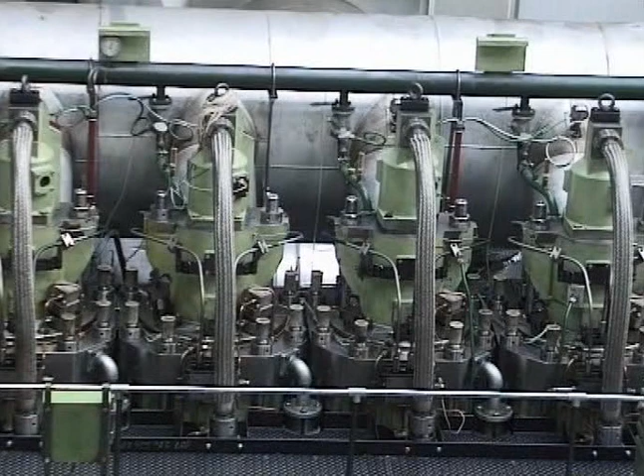This video, together with the operation and maintenance manual, will help you carry out maintenance work on the exhaust valve. Descriptions of functions are found in the operating manual, and instructions for maintenance are found in the maintenance manual. Please read carefully all the pages in both manuals that are referred to in the course of the video.

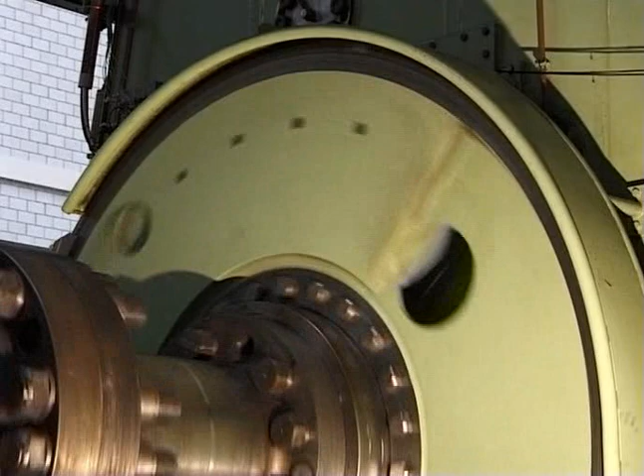After shutting down the engine according to the instructions given in the operation manual and all pumps have been stopped, further preparations have to be made before starting work on the exhaust valve cage as follows. Close the starting air shutoff valve. Open the indicator cocks.

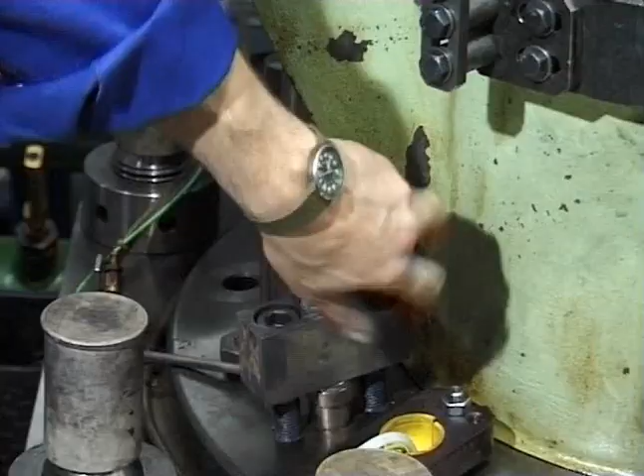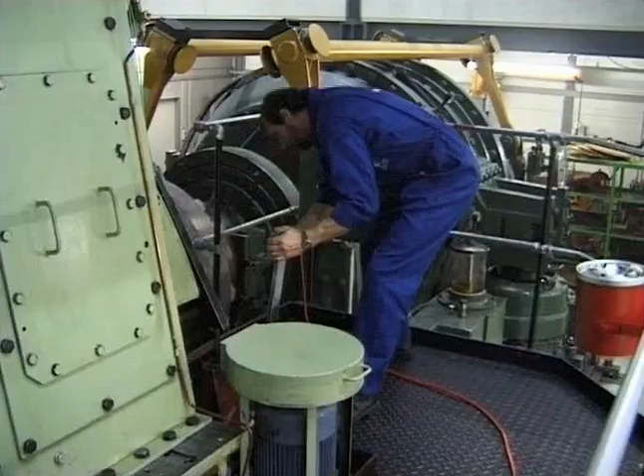Engage the turning gear. Close the exhaust valve air spring supply here. The cylinder cooling water of the corresponding cylinder must be drained according to the instructions given in the maintenance manual.

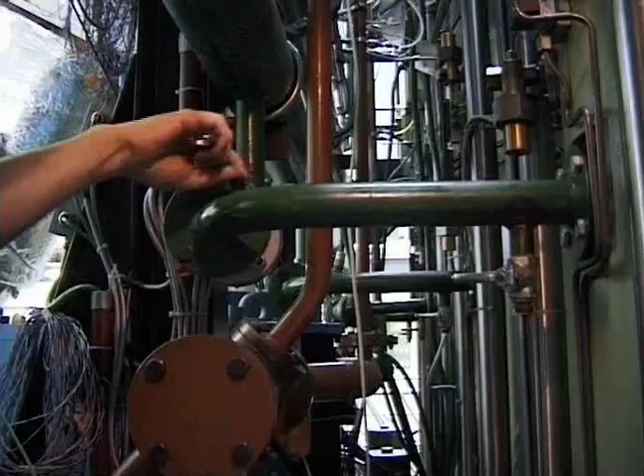First, close the cylinder cooling water outlet valve here. Next, close the cylinder cooling water inlet valve. Finally, open the cylinder cooling water drain valve of the corresponding cylinder.

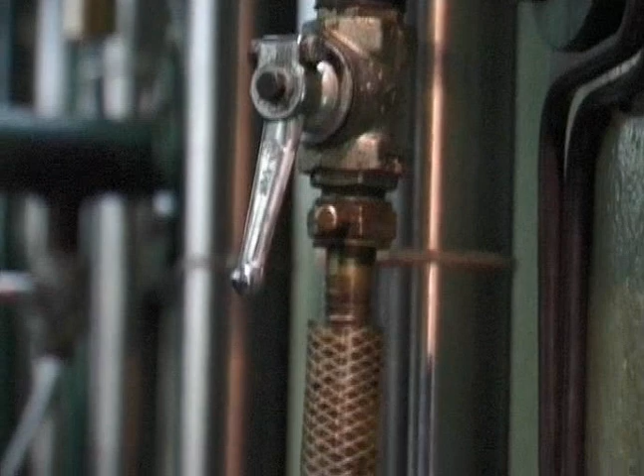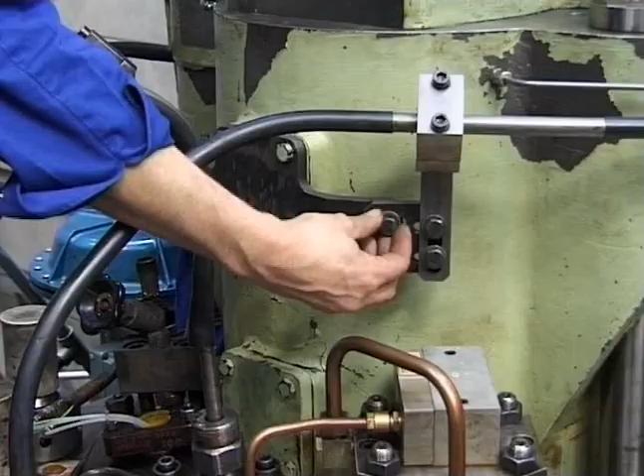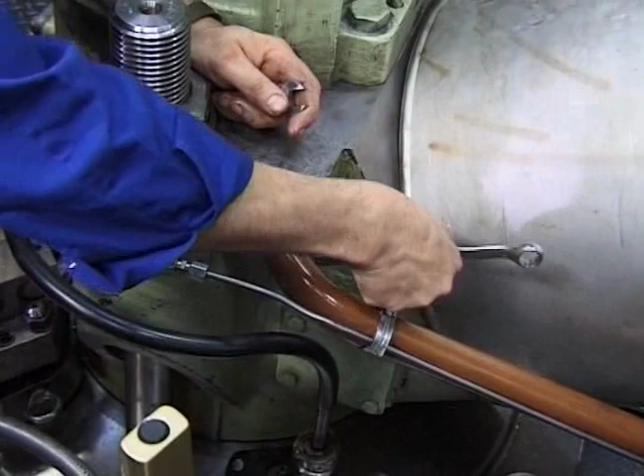Disconnect all pipes which are attached to the valve cage. Protect the pipe connections from dirt and damage. Carefully remove this insulation piece, and if it is still hot, protect your hands by using gloves.

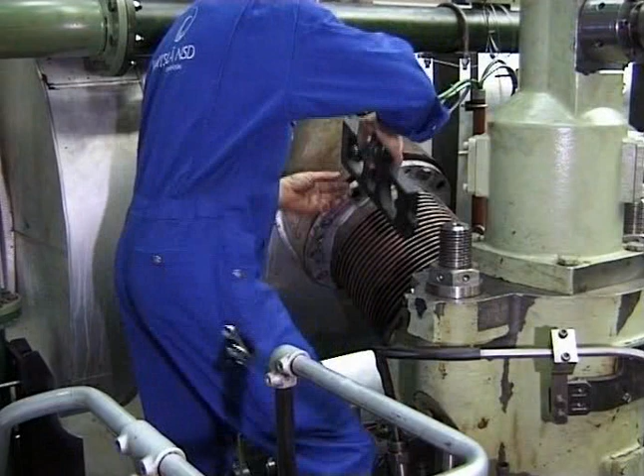The expansion piece will be removed with the help of this lifting device, also provided with the engine tools.

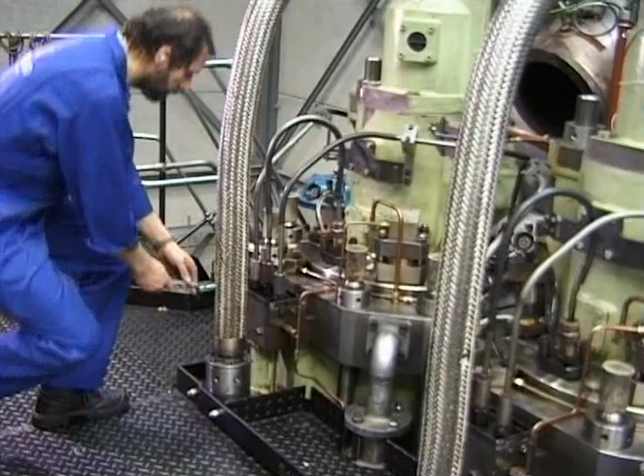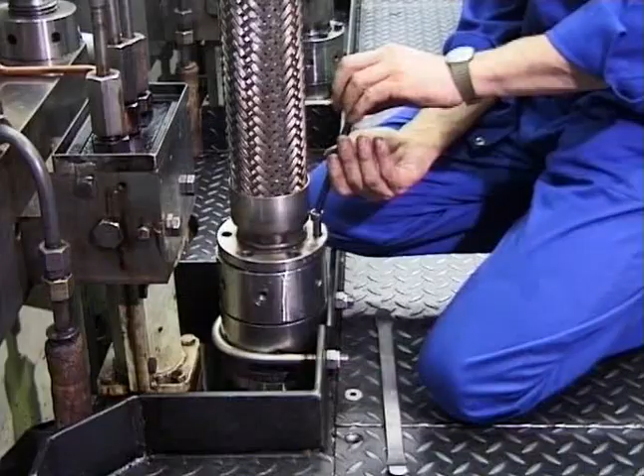Slacken first the lower flange. Thereafter the contained oil will be drained from the high pressure pipe through the double pipe ring area by lifting it slightly from its lower sealing seat. Consult the maintenance manual on this procedure.

After slackening the upper flange, it must be turned back about 7 turns before the pipe can be removed completely.

Also, this ball seat must be treated with utmost care to avoid damaging its surface. Should this ball seat be damaged or in bad condition, it may be repaired with the help of this special milling and lapping device provided with the engine tools. Look up the maintenance manual on this point.

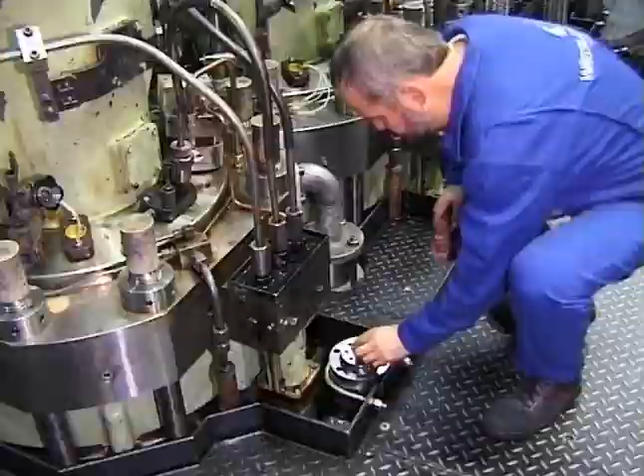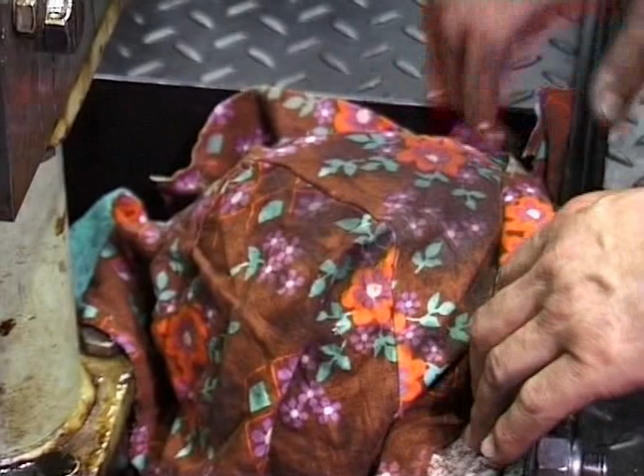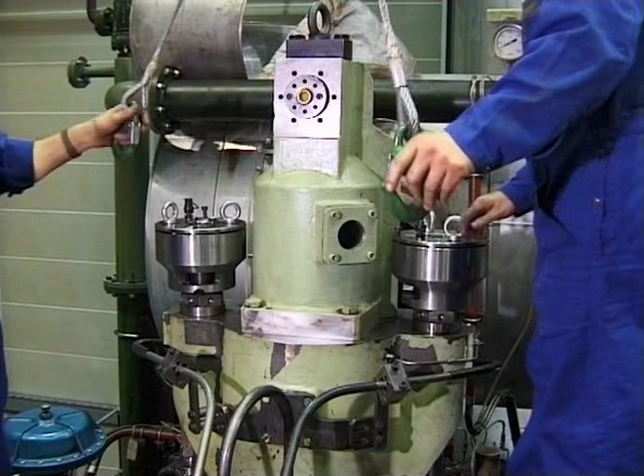Make sure that the stud threads and contact surfaces for the jacks are clean and undamaged. These are the hydraulic pre-tensioning jacks we are going to use to slacken the exhaust valve cage from the cylinder head. Look in the maintenance manual under the section Hydraulic Pre-tensioning Jacks.

Now check carefully all high pressure connections. Make sure that the quick couplings of the high pressure hoses are properly locked. The hydraulic pre-tensioning jacks are now tightened until the clearance at X is very little or zero. The release valve of the high pressure pump must be kept open in order to do this.

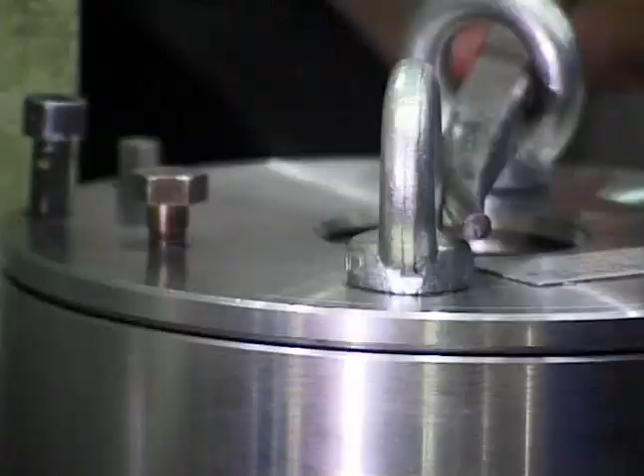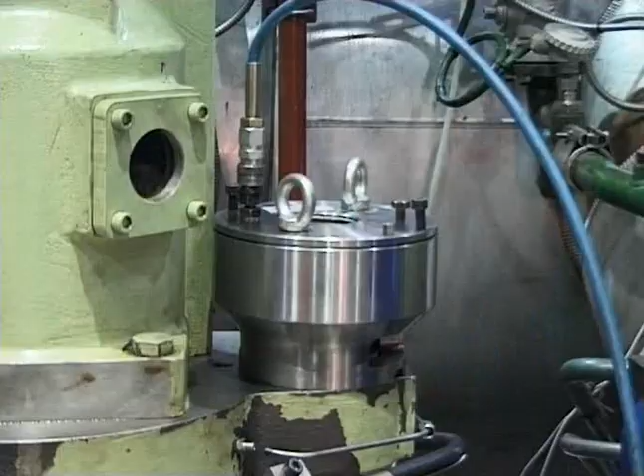Do not forget that when slackening, the hydraulic jacks must be turned back by about 3/4 of a turn. Otherwise the jacks cannot be removed. Look up the maintenance manual on this point. Start the high pressure pump and keep the vent screws open until the oil emerges without air bubbles.

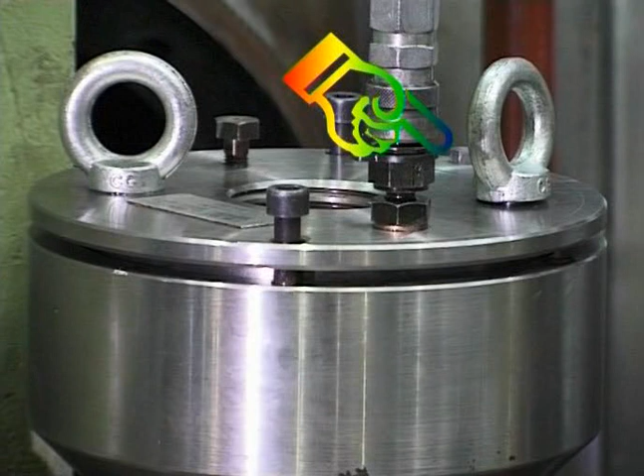When loosening, check that the control pins of the pre-tensioning jacks always protrude slightly above the upper edge of the piston. Consult the maintenance manual on this point. Please remember to follow all the safety precautions when using hydraulic equipment, especially the use of safety goggles. Remember, protect your eyes.

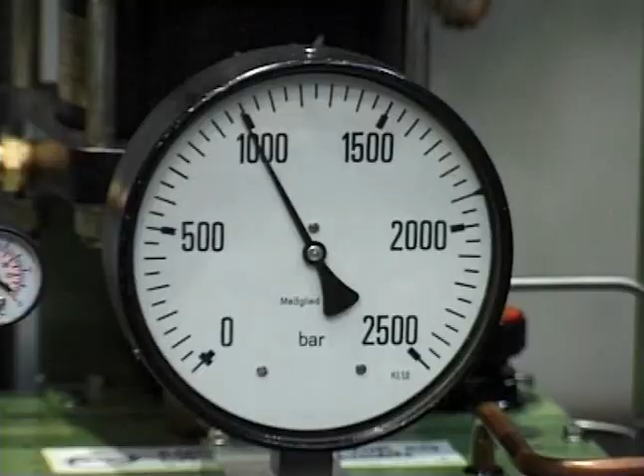Raise pressure to about 1000 bar so that the nuts can be slackened with the help of this Tommy bar. Finally, turn the nuts back about 1 to 2 turns. Before lowering the pressure completely, check if the nuts can be moved freely.

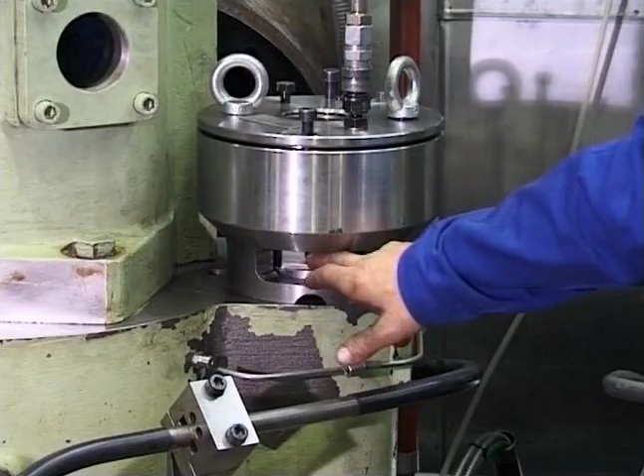The nuts holding the valve cage are now slack. Remove the jacks and also take off the nuts completely. The valve cage is now ready to be lifted off.

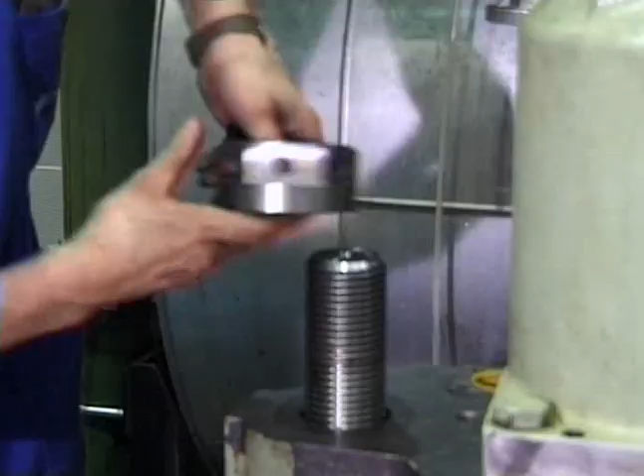Check once more if all pipes have been disconnected before lifting off the valve cage. With this lifting device, which is included in the engine tools, the valve cage can now be lifted off the cylinder head.

Note, it is absolutely forbidden to lift the cylinder cover together with the valve cage only on these two eye bolts. Now carefully lift the valve cage from the cylinder cover.

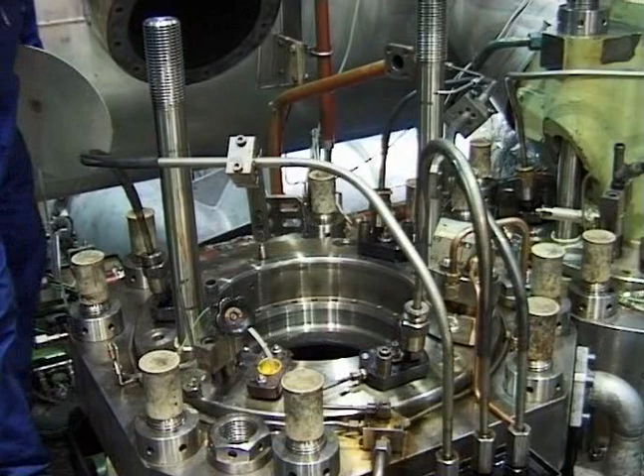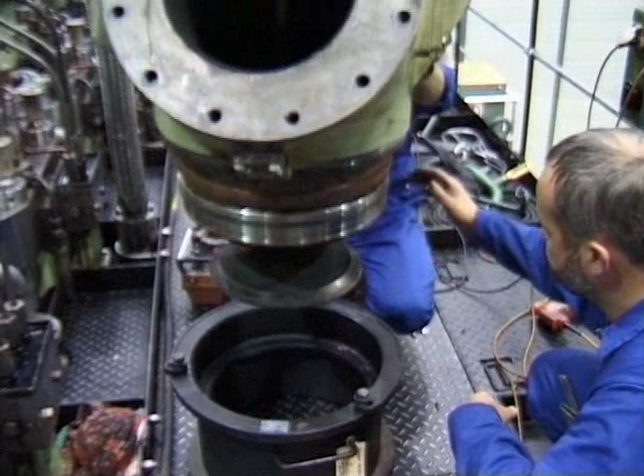After lifting the cylinder cover, the combustion space must always be covered to prevent any dirt ingress. The valve must be protected against damage. For that reason, the valve protector has to be fitted whenever the valve cage is dismounted from the engine.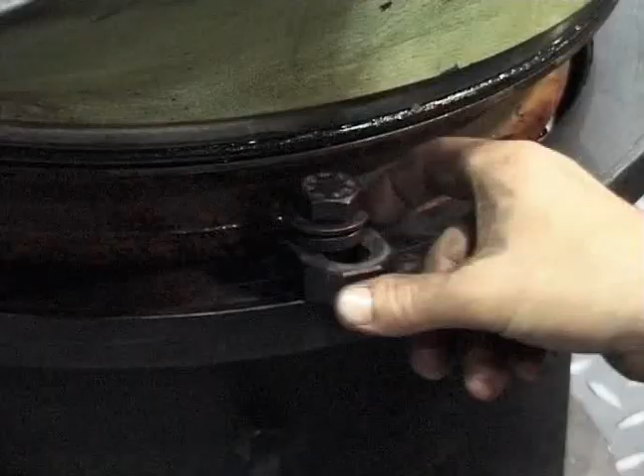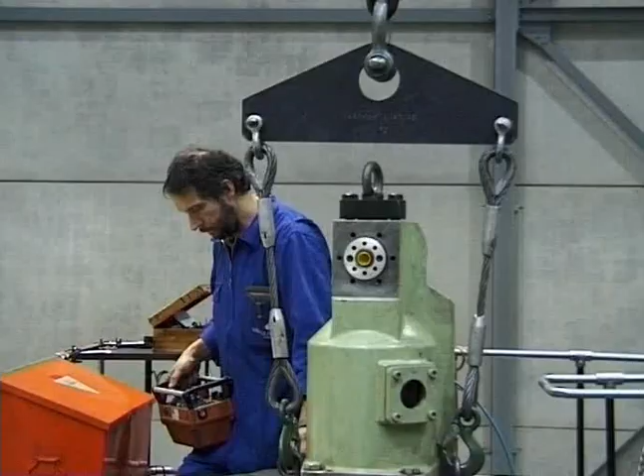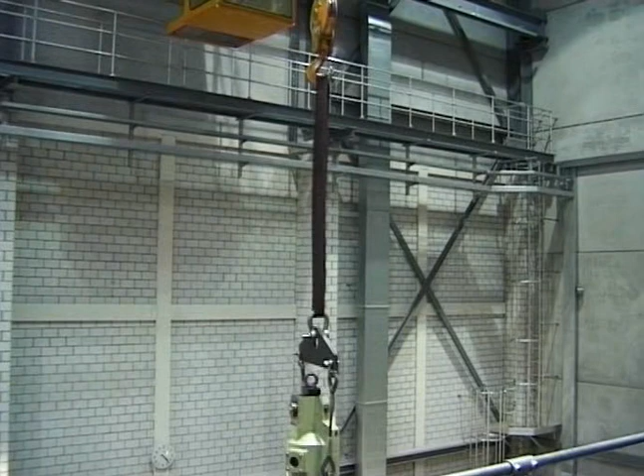The valve cage is transported to a place where overhaul of the valve will be undertaken. That place should be as free from vibration as possible. Please note that damaged or worn down valve sealing surfaces can be reconditioned. Such work on Nimonic valves may only be carried out by specialised Wärtsilä NSD reconditioning centres. A new spare valve cage or a reconditioned one must always be on board.

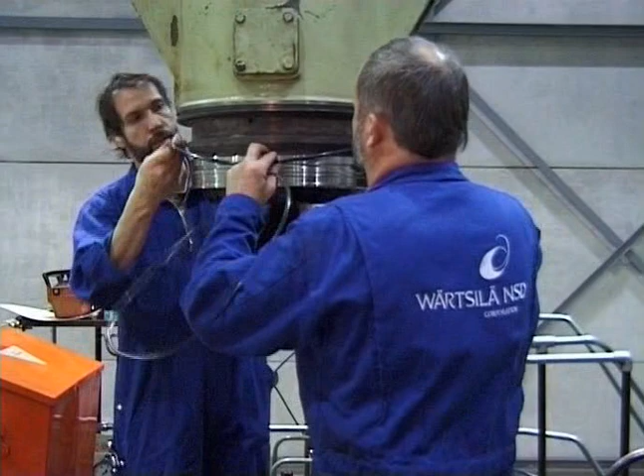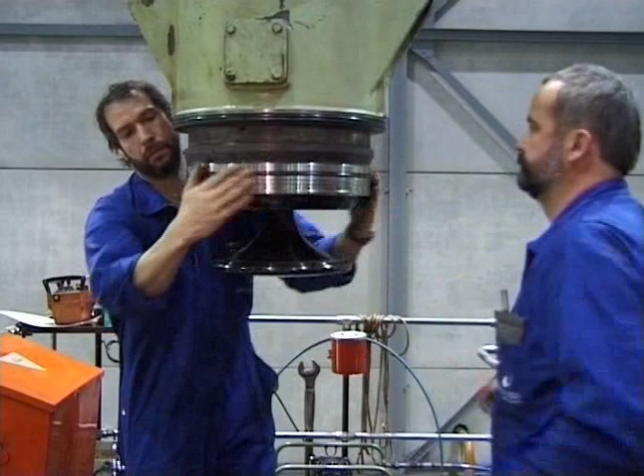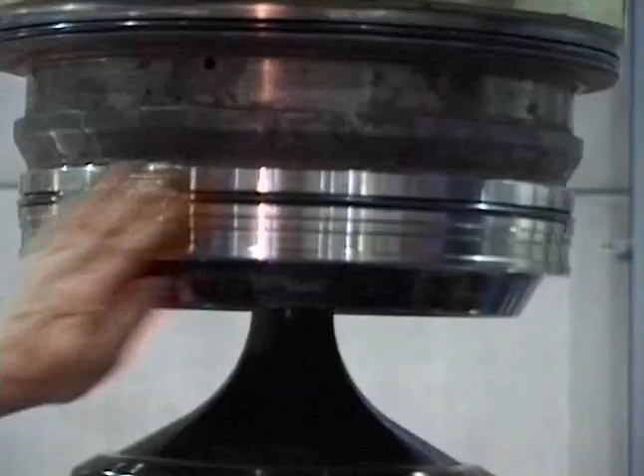As a general rule, replace all O-rings by new ones of specified dimensions and quality. Consult the maintenance manual for details. Oil O-rings slightly with clean lubricating oil. The sealing surfaces between the exhaust valve and cylinder head must be carefully checked for cleanliness and possible damage. We strongly recommend fitting a new soft iron ring 2 mm thick between the cylinder head and valve cage at every overhaul.

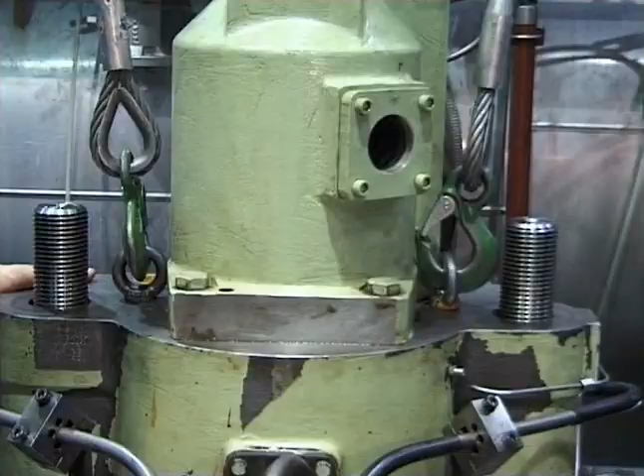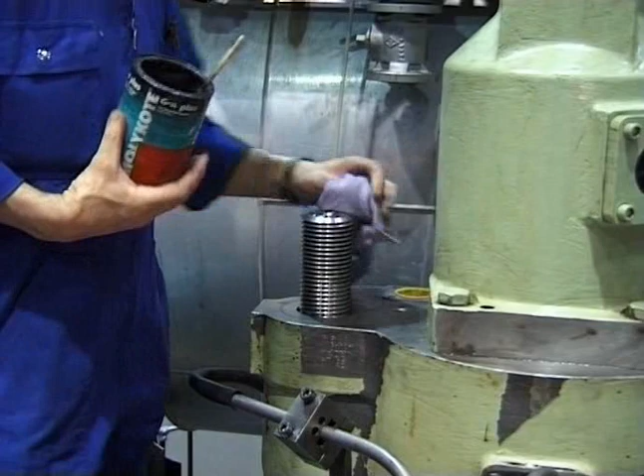Take great care not to damage the thread of the waisted studs when lowering the valve cage. The correct position of the exhaust valve cage is given by this cylindrical dowel pin. Smear the threads of the waisted studs and contact surfaces with Molykote paste G and make sure that the nuts are tightened onto a clean and smooth surface.

Tighten the stud nuts firmly with a tommy bar until fully seated before mounting the pre-tensioning jacks. For later checks, mark the position of the stud nuts on a corner and their position on the valve cage with a felt tip pen.

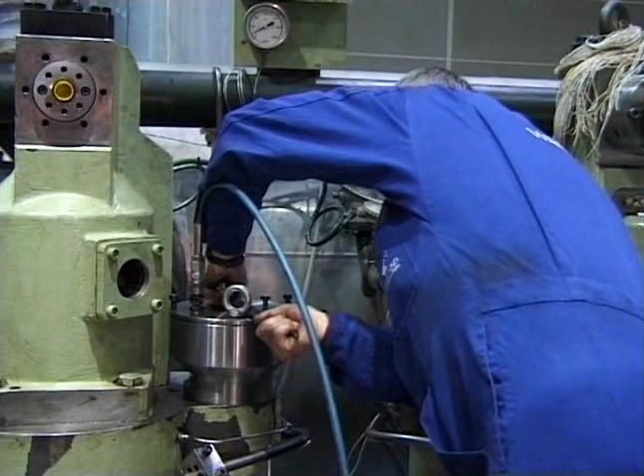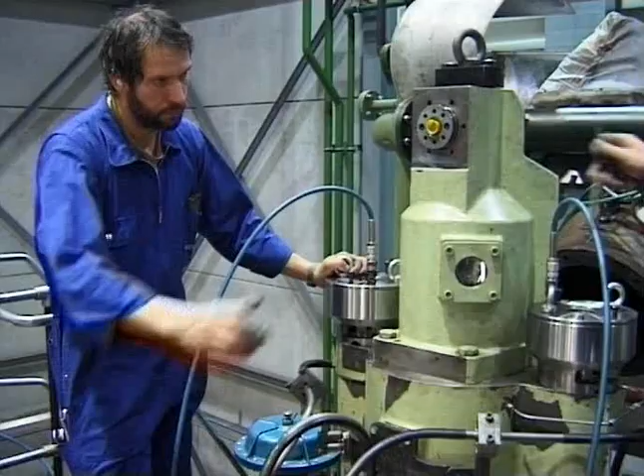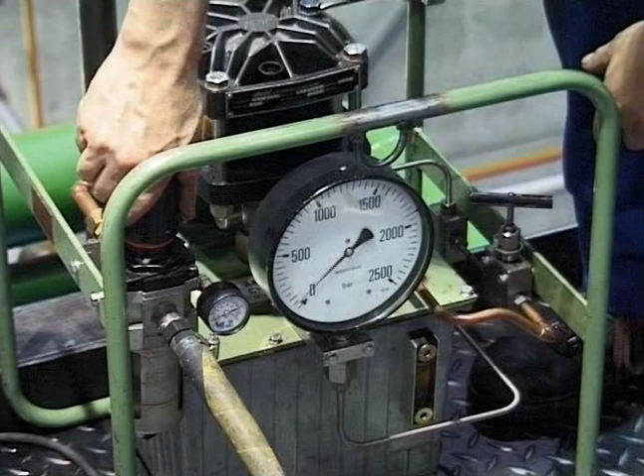Open the release valve of the high pressure pump and screw down the pre-tensioning jacks onto the waisted studs completely. Check whether there is no or very little clearance at the gap X. Look up the maintenance manual on this detail. Check the proper nut seating with the feeler gauge. Start the high pressure pump and keep the vent screws open until the oil emerges without air bubbles. Slowly raise the pressure exactly to 1000 bar.

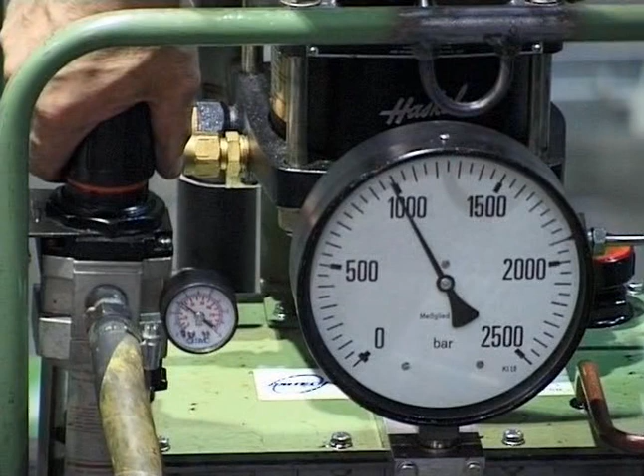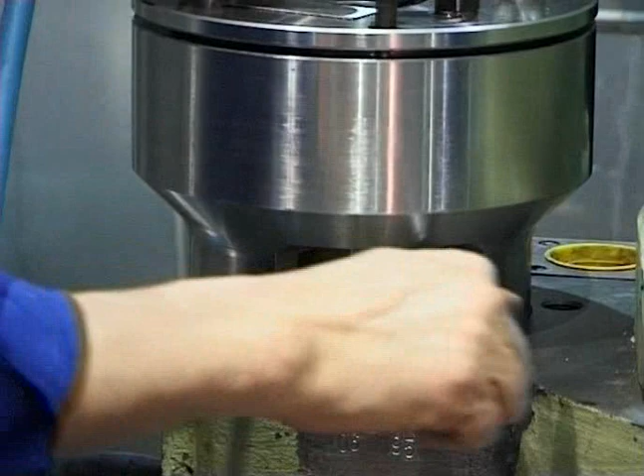Attention should be paid when the pressure is rising that this pin always protrudes slightly above the upper edge of the jack. Keep the pressure constant at 1000 bar and tighten the stud nuts with a tommy bar until the nuts are firmly seated on the exhaust valve cage. Check with the feeler gauge that the nuts are making proper contact before lowering the pressure. After removing the jacks, ascertain that the two nuts have been turned by about the same angle of approximately 165 degrees.

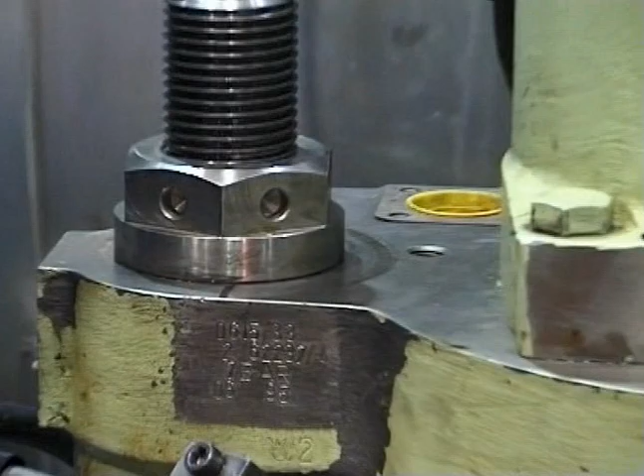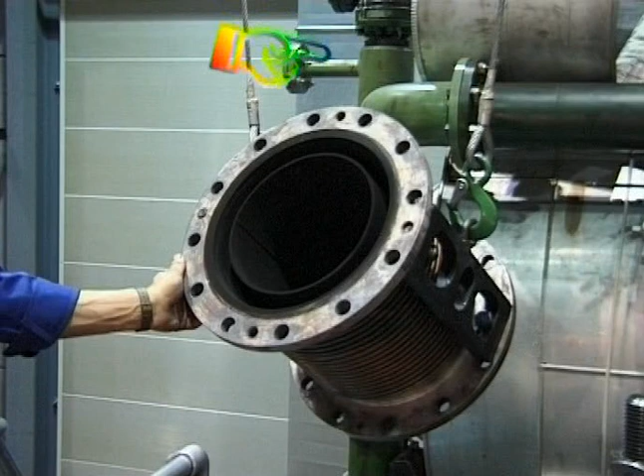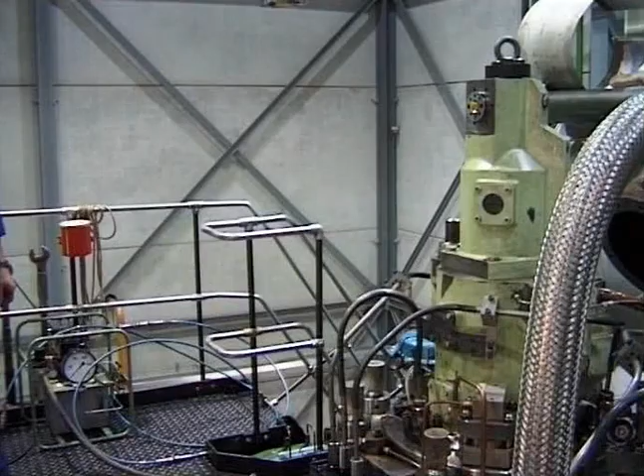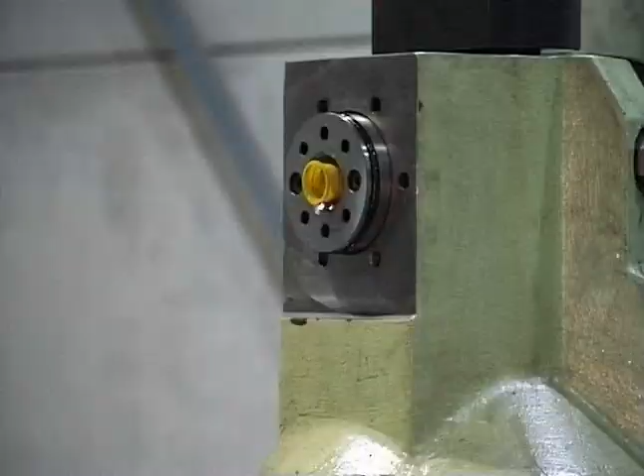Now we reconnect all the pipes in the reverse order. The expansion piece has to be fitted in such a way that the internal protection pipe of the expansion piece is pointing in the gas flow direction. The arrow indicates the correct orientation. Lightly smear the expansion piece connecting screws with a heat-resistant lubricant. Check carefully that the sealing faces of the high pressure pipe as well as the landing faces in the sealing rings are clean and undamaged.

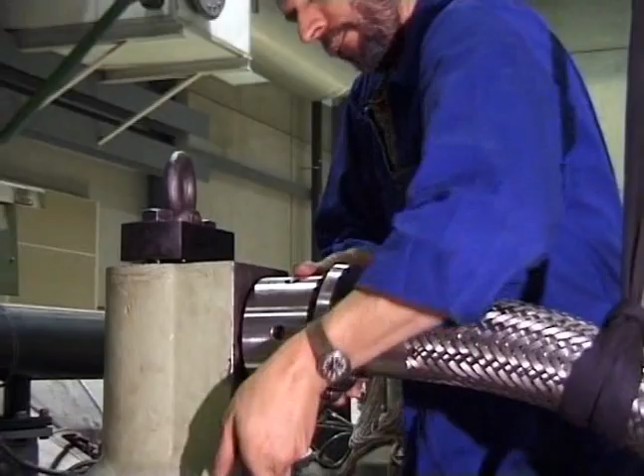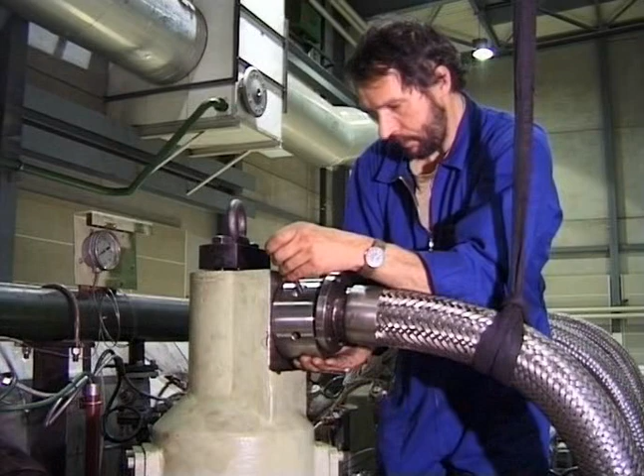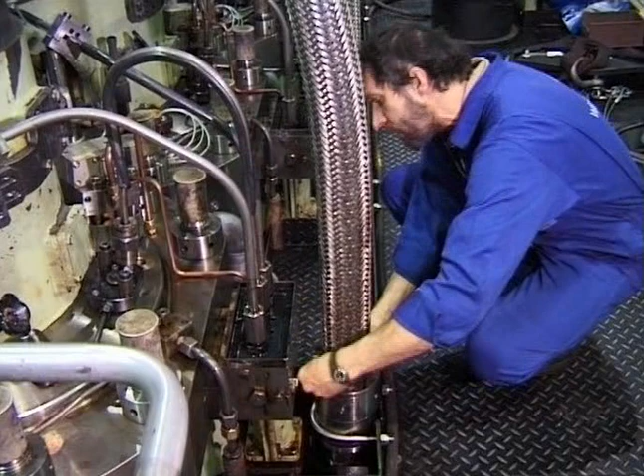The pressure pipe flange shall be screwed to the pressure pipe in such a way that after tightening all screws crosswise, the clearance X1 is parallel and amounts to about 3 mm. Check it once more with the feeler gauge after tightening the screws. Look up the maintenance manual on this point. Here also, after tightening crosswise all screws, the clearance X must be parallel and should amount to about 3 mm. Check it with the feeler gauge and look up the maintenance manual again.

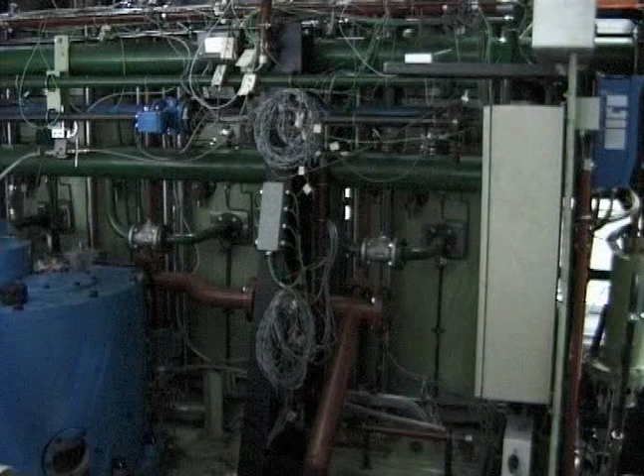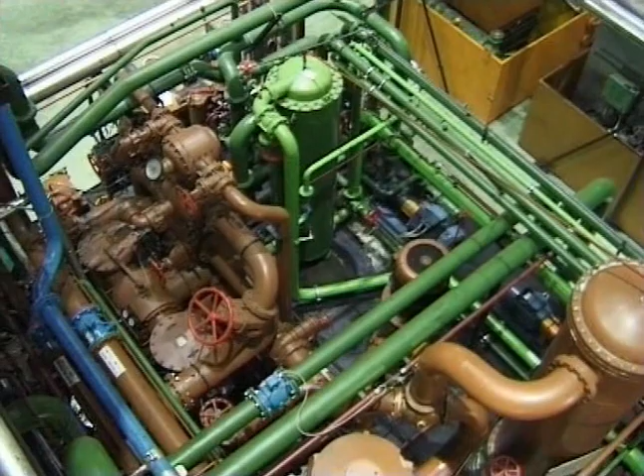Now we restore the engine to the original conditions. Close the cylinder cooling water drain valve. Open the cylinder cooling water inlet and outlet valves. Open the exhaust valve air spring supply again. Start the oil and water pumps. Finally, all connections must be checked so they make a complete seal against any water or oil leakage. Before starting the engine, follow strictly all indications in the operating manual stated under preparations before taking into service.

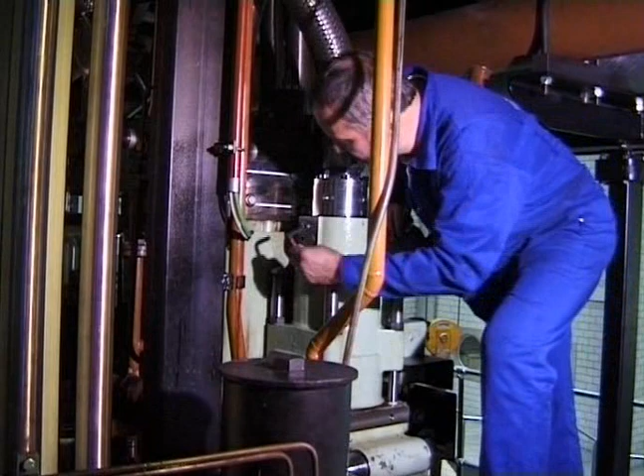Every time after the exhaust valve high pressure pipe has been involved in an overhaul, check while the engine is running if the flange connections of the hydraulic pipes are free of leakage. This is done by removing the screw plug behind the actuator pump. No oil must flow in this leakage oil bore.